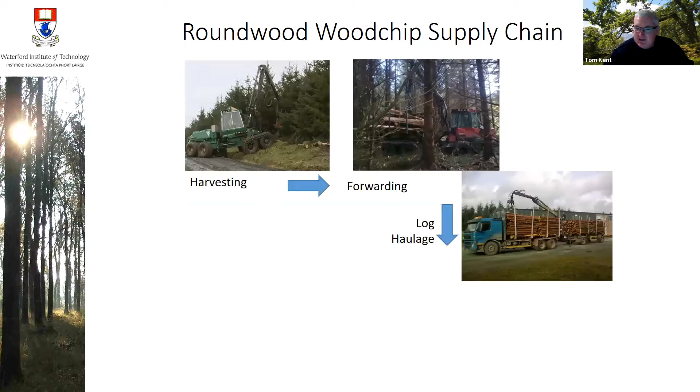So what might be considered a typical supply chain for wood chip production from roundwood is the thinning of your forest, the forwarding of roundwood to roadside, the transportation of that to some type of storage and seasoning facility at a terminal, and then the production of wood chip after seasoning and the supply of that wood chip.

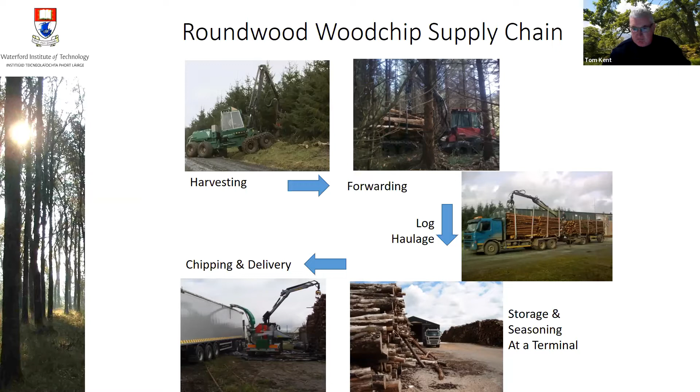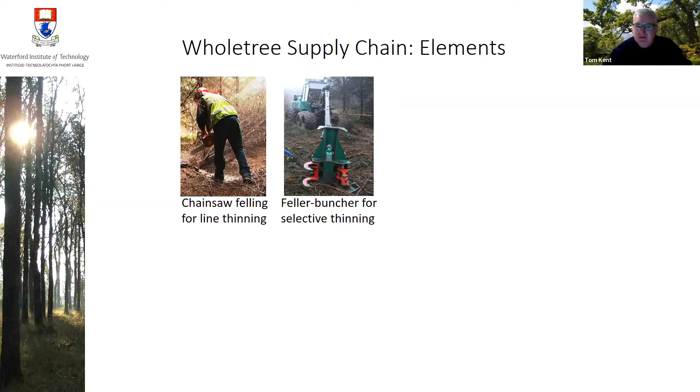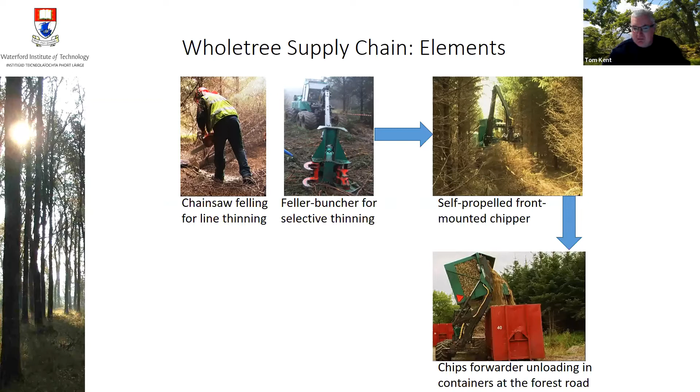Again, this is a supply chain we've a good deal of experience of in Ireland now, with many producers, and it's not the only supply chain we've studied. We've looked at other supply chains like taking whole trees by either felling with chainsaws or feller buncher and using a self-propelled front-mounted chipper, forwarding those wood chips to roadside with another specialized machine, a chip forwarder, and using container trucks for road transportation.

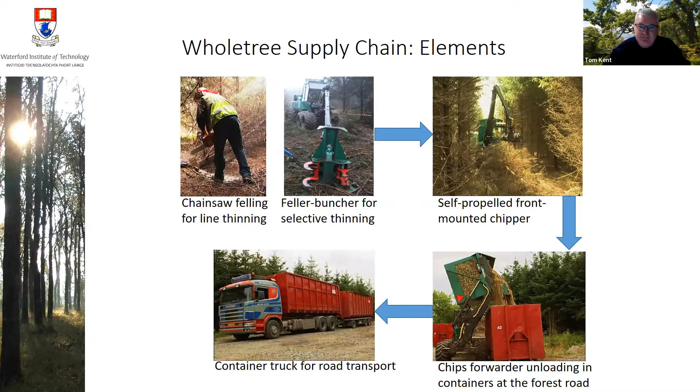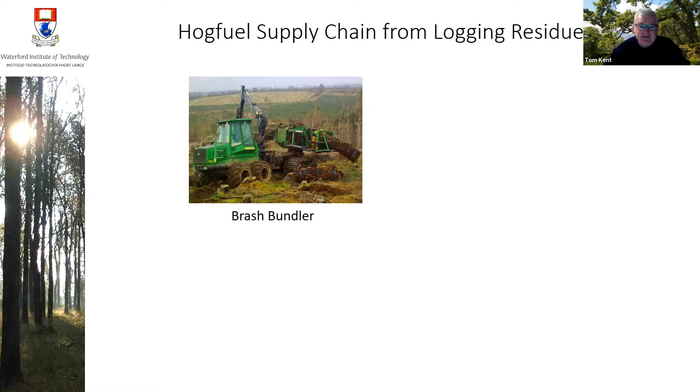We've looked at wood fuel production as well from the residues of clear felling—so the brash or lop and top that's left after roundwood harvesting at clear felling—starting with a brash bundler, the extraction of those bales to roadside, transportation to the end user, and shredding of that material into a hog fuel.

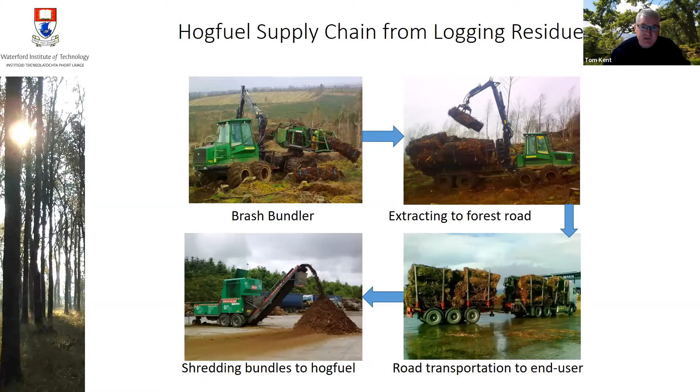We've even studied the excavation and windrowing of stumps after clear fell, extraction of those stumps to roadside, the shredding of the stumps, and again loading and transportation. So we've developed a good deal of knowledge of different materials coming from the forest and how to convert those into a wood fuel.

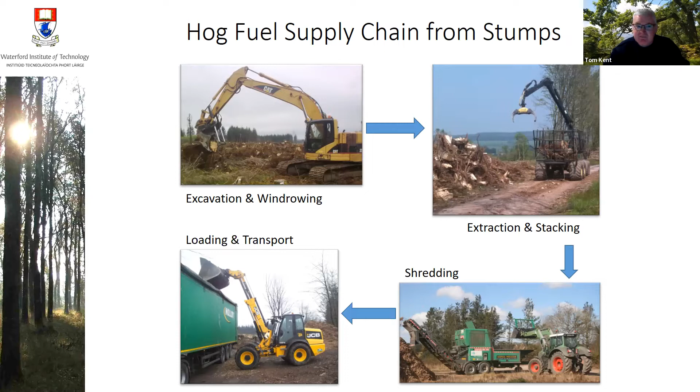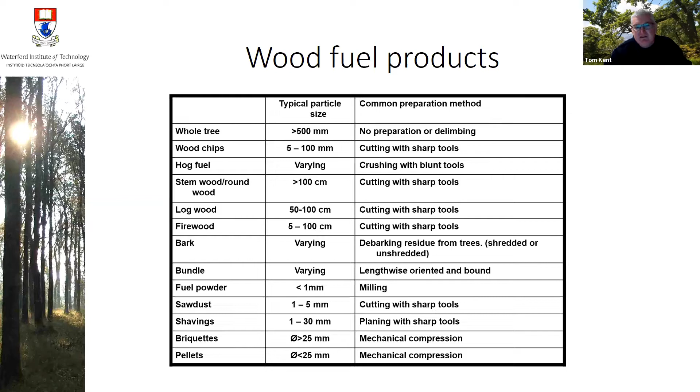These different supply chains produce very different types of wood fuel products. Here's a list from the international standards of just the different types of wood fuel products that can be described, where, as you can see, wood chip is just one of many.

So because of these different types of fuels that are produced, standardization is very important, and it's important for a number of reasons. The standardization of wood fuel quality is important to ensure that the fuel is compatible with the boiler it's being used in. Different boilers will have different fuel specifications, so it's important to know and match the right fuel for the right boiler.

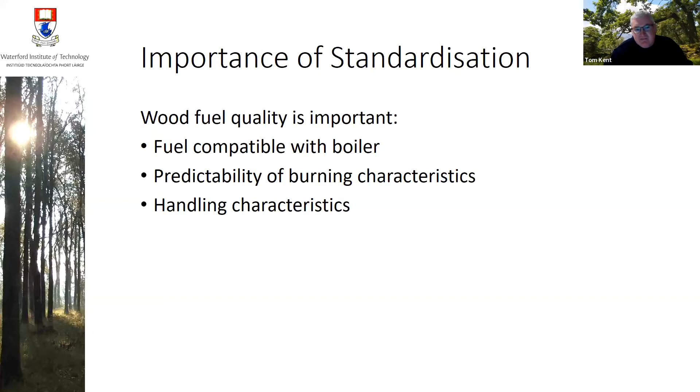A fundamental point is that both seller and buyer can trade with confidence. By standardizing fuel quality, that facilitates confidence in what's being sold and bought, achieving a fair price.

And this is an ongoing area of machine and equipment development, whereby manufacturers of chippers, of wood fuel transportation systems and wood fuel boilers are all developing more and more specialized, reliable, efficient equipment and machinery based around being able to target a standardized wood fuel.

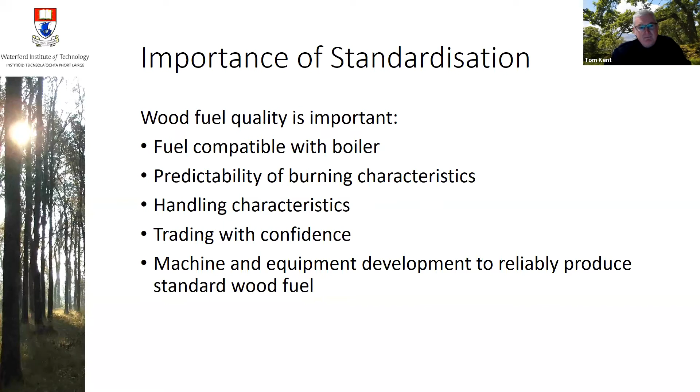So we've had now over 10 years of solid biofuel standard development. Initially, this work was started at European level with a technical committee on solid biofuels. Their work has been documented in a series of 26 standards, I think. Those European level standards were adopted at national level, so it became an Irish standard, and subsequently the current work is the global adoption of the initial European solid biofuel standards.

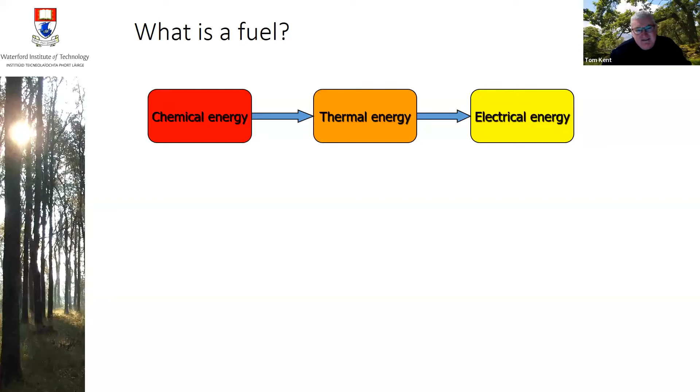Biomass fuels have a chemical energy that's based on their chemical composition, where mainly the carbon, hydrogen, and sulfur components are the ones releasing heat as they burn, and nitrogen, oxygen, and ash components are, if you like, taking some of that heat away. Why do I mention this?

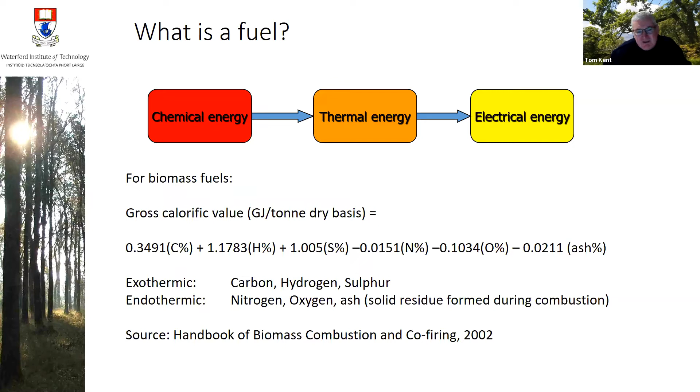Well, it's very simply that wood fuel has very, very consistent energy content when it's looked at as a dry material, so without considering the moisture content that's in the wood.

So why do we find differences in calorific value of wood? Well, I guess most of you have seen this sort of graph, the effect of moisture content on the calorific value of wood. There's this dramatic decline. So if we look at the calorific value of a ton of wood in gigajoules, it starts up here close to 20 gigajoules per ton.

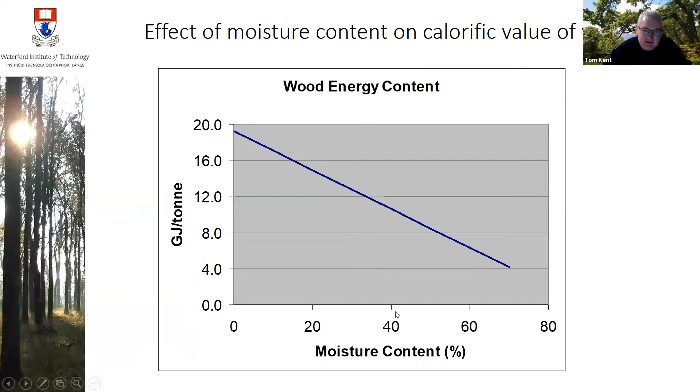I'd like to look at that in a bit of a different way, where, to be honest, a lot of this decrease in calorific value is simply because we're displacing wood with water. If we include the moisture content of wood, really what's happening in every ton is now there's less wood and more water. And so if we get to a 50% moisture content, it simply means that now we've only got half a ton of wood, but we've also got half a ton of water. So in fact a lot of that reduction in energy content due to moisture content is simply we're displacing fuel with water.

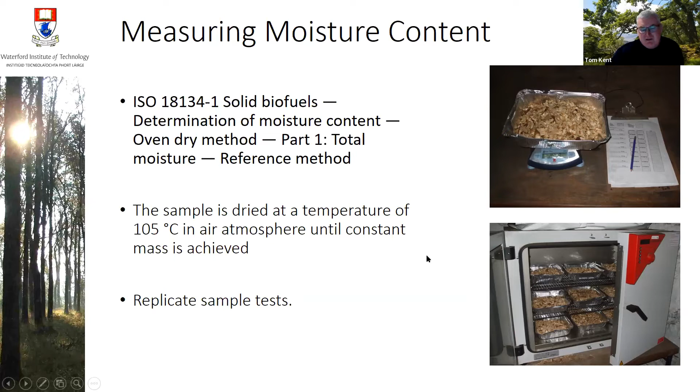So what's the expected moisture content of your fuel? We've got this international standard again for describing wood fuels, and that basically describes them in classes of 5% increments in moisture content.

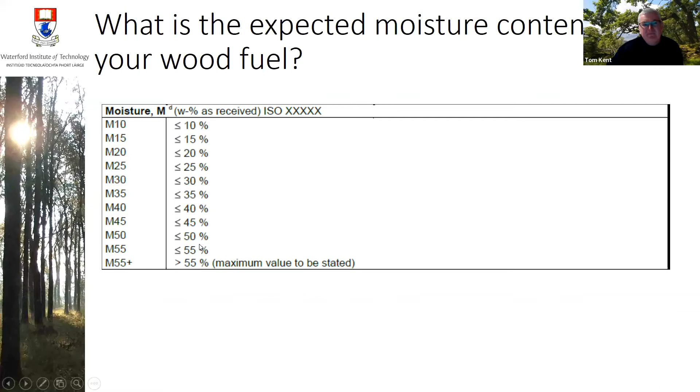So what can we do to store roundwood to promote seasoning? Again, it's not hugely complicated, but in Irish conditions what we can do is use the ambient environment, choosing the windiest, most exposed spot you can find, ensuring that logs are raised above the ground, and ideally covering.

This is a storage trial we did down in Cork a number of years ago, where we covered half the material and left the other half uncovered. And to be honest, what we would find is the uncovered material just had water lodged in it anytime after rain. So the cover really just had the effect of preventing that lodging of water.

We studied monitoring moisture content change over time quite intensely, and we've made these frames where we can constantly weigh the change, measure the change in weight of roundwood over time, and we can determine then how moisture content changes over time.

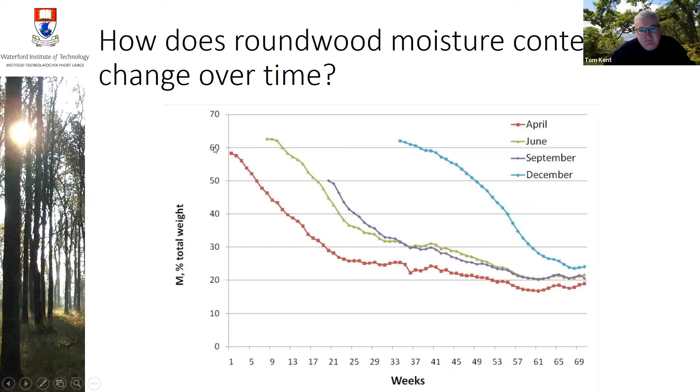We stored roundwood at different times of the year, starting it at different times of the year, and the effect of storing at different times of the year can be as much as nearly 3 months, 2.5 months in terms of the drying time to get to 30% moisture content. So really what we've found is, from March to September, we can get effective drying. From October to February, we don't.

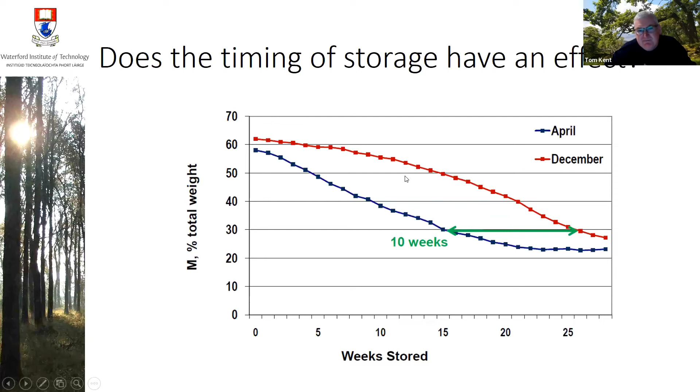However, what we did find was, as we looked at the material after seasoning, we selected out some logs throughout the stack, and the stacks with no cover had much more variable moisture content. So as we go down through the stack, we see wetter logs at the top and then gradually getting drier, whereas the covered stack had much more consistent moisture content.

We've done similar trials for firewood. We set up this trial in Carriganore in Waterford, where we looked at 10 different treatments. We cut firewood to different lengths, split it, and left some of it in the round. We covered some of it with tarpaulins and left some uncovered. We left some of it as 3 meter lengths, again covering some and leaving some uncovered. We produced this fantastically complicated looking graph, but in effect it just demonstrates the same thing.

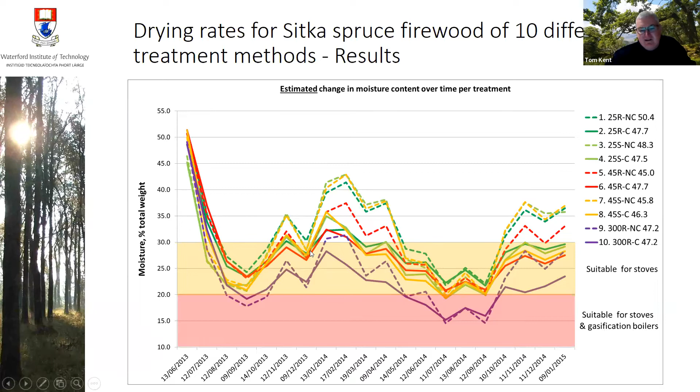So I wanted to focus on moisture content because the other parameters, if we use clean fuel and a reliable wood chipper, tend not to produce too many problems. But moisture content is the critical parameter that we have to understand and control.

In summary, we know how to produce dry wood fuel. It's really important that anybody producing wood fuel can monitor and measure their moisture content. And I would say also, if you're a wood fuel supplier and aren't already a member, definitely join the Wood Fuel Quality Assurance Scheme. Okay, I'm going to finish at that.

Okay, thanks Tom, that was very informative, and it's great that someone like you was doing such background into wood and wood energy and wood quality, and the Wood Fuel Quality Assurance Scheme. Sure, it's great that we have something here, a standard set up, and there's room for this to be pursued a lot more. So Tom, we'll leave it with you for the time being, and we'll head on to Will Gabbett because time is moving on.

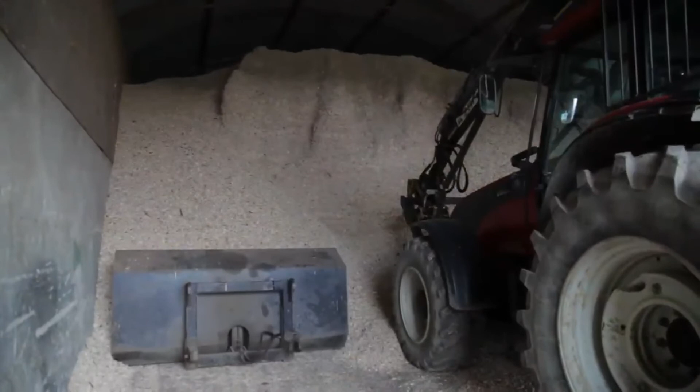We were delivering to about 10 or 12 different boilers within what we call tractor range, within a sort of 20-mile radius. With the wood chip, primarily the source of the timber is from local woods around the area that we would purchase in, because even with 100 acres of forestry, we're unable to supply ourselves with enough timber. So we buy from local growers through forest management companies or forest companies.

The very local nature of this fuel network speaks directly to current energy concerns. The whole concept of the thing being parish-based rather than a national base. So the timber comes from locally, and it's dried here, and it's chipped here, and it's delivered locally. So the actual carbon footprint of delivery and diesel and everything else is so much less.

When the wood chip business started up, they were buying in most of the softwood for chipping from local forests. This also points to the long-term nature of forest rotations. There's quite a lot of softwood that we do as well, so that's really good, because we can dry it down well below 20% within a 9-month period, as long as we have those summer months. That really is tied directly to the biomass that we buy in for chipping.

We can only supply ourselves with a small amount of timber for softwood, but hopefully there's more coming online all the time, because, as you mentioned earlier, it's a historic thing, and I'm working from what my father has planted in the past, and hopefully my kids will be working from what I've been doing in the past and all the rest. It really is a sort of slow process, forestry, and you're always just working with what people previous to you have done management wise.

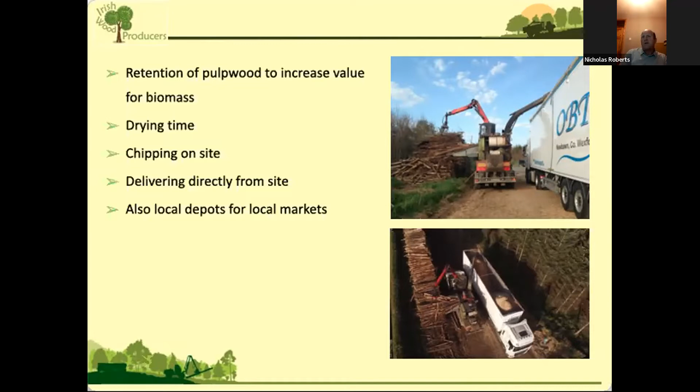So it's delivered directly from the forest to our end user. There are also smaller local depots as well for more local markets.

So, wood chip specification, Tom would be very familiar with this one. Here on the depot we have two sizes that we aim for, P100 and P60. Our customer Danone would be P100, which is basically a bigger chip with higher moisture content. The smaller boilers then would want P60 or P50 with lower moisture content. The smaller your boiler, generally the lower your moisture content has to be.

So we constantly watch our moisture contents. As I mentioned earlier, we have a humimeter or moisture meter, and we also have ovens and scales. Alex takes care of all of that, and the sieve shaker is just to get your particle size correct.

Even though the timber is grown in the forest with a roadway right beside it, you might think you'll just put the timber out there and everything will be grand. But as you can see from the picture, that's one of our chipping contractors, that lorry weighs 29 tons. He went in just off the roadway, and down she went. So there can be particular problems with trying to chip on site.

Some sites are brilliant, ready to go with no problems, but not everywhere is set up for it.

So there are a couple of different challenges with that. You have your drying time, which varies on different sites, especially in first thinnings, because the forest is growing and the roadway might go into the dead center of it. There's nowhere else to put the timber, so it's put in the dead center of the forestry with no airflow through it, since the trees are growing all around it. So it takes a long time to dry down, which creates challenges to chip on site. It works in some places, but not in others.

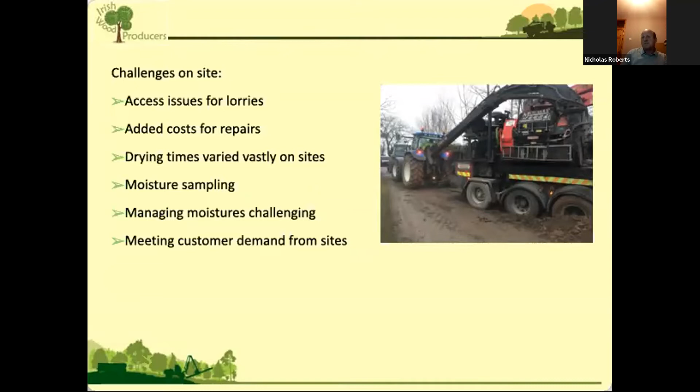So about 4 years ago, there was a decision made within the group to try and bring everything to a central depot, to try and control the moisture content, control the deliveries, and control unforeseen circumstances that can happen when you go on-site.

So a breakdown of what happens there: the pulp is harvested and put out roadside onto the forest. It then comes to the depot here just outside New Ross. The weighbridge is to the right-hand side, you can't see it, but it's weighed in over the weighbridge. It's then put down some of the roadways, which you'll see in the next slides.

The driver of the pulp lorry marks all the stacks with the grower's number, and all the stacks are put separately on the roadway. We then work out the time that particular lot came in and how long it will take to dry down. There's not a huge variation, but some species can dry a bit quicker than others, or if it's pulp from a clear fell rather than from a first thinning. So we watch all that and make sure it's drying down, and that we go to the right stack when we go to chip it.

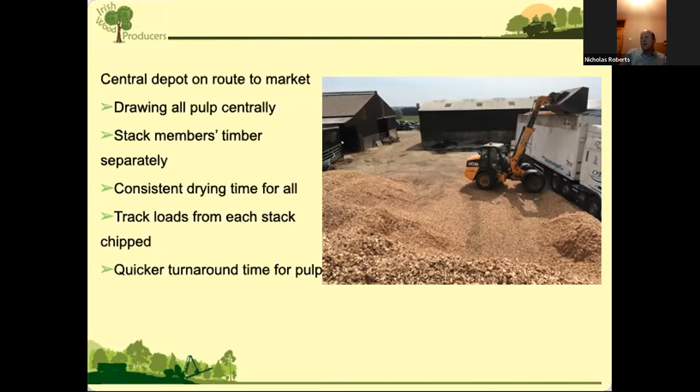Okay, next one please. So those pictures are of chipping on site here.

We'd like to think we manage the moisture more efficiently by having it here at the depot, and then we have a covered store. We had it outdoors for a few years, but we put up a covered store last year, and it's made a big improvement on our ability to control moisture content, obviously from the rain out of the sky. So it's all in a shed now, and we can guarantee that once we chip it at the given moisture, it's going to stay at that moisture content. It was a 60 meter by 25 meter shed put up last year, with a dividing wall in the middle, so we can keep drier or smaller material on one side, and the material for our bigger customer Danone on the other side.

So as I said earlier on, we're well geared up for the future. Hopefully there's an investment being made, and hopefully that will work out for us. Okay, on you go.

So as I said earlier on, there are north of 850 members now. Sustainable forest management practices, that's something we're very clued into, making sure we follow everything our customers require in terms of, I can't say certification because we're not there yet, but we're on our way to that. But we have what's known as a chain of custody from source to market, which helps us guarantee that all our timber is harvested sustainably, looked after well, and that we send a quality product to our end user.

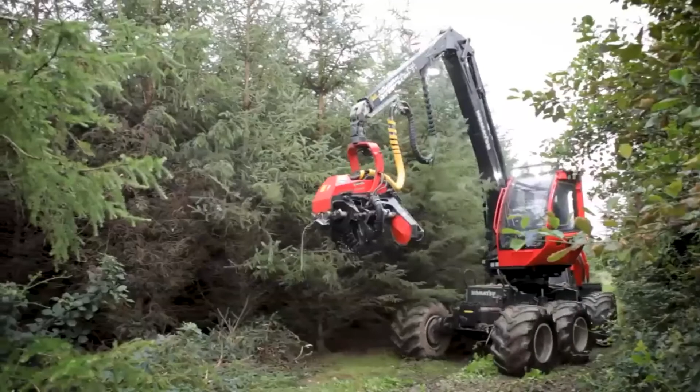It's very important to us to support the local community as well. So as a business in the southeast of Ireland, we're very keen to support other local businesses and try to build the community and build our suppliers up locally.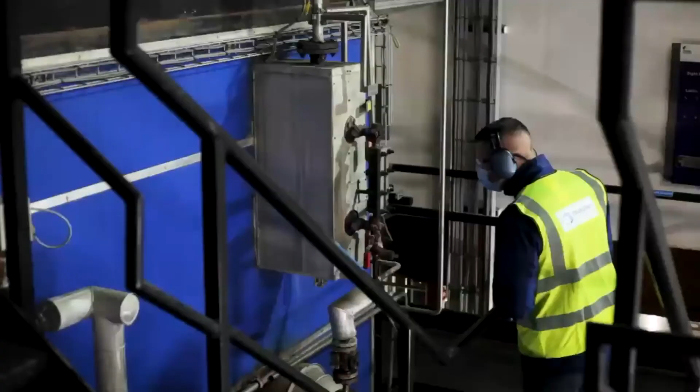The biomass boiler drives this process, and from the delivery of the wood chip there's a lot of expertise and precision brought to bear. The truck backs in, and first of all we take samples here on site by our boiler man, and he'll bring it down to the oven, and that's where we get our moisture content from weight before and after heat.

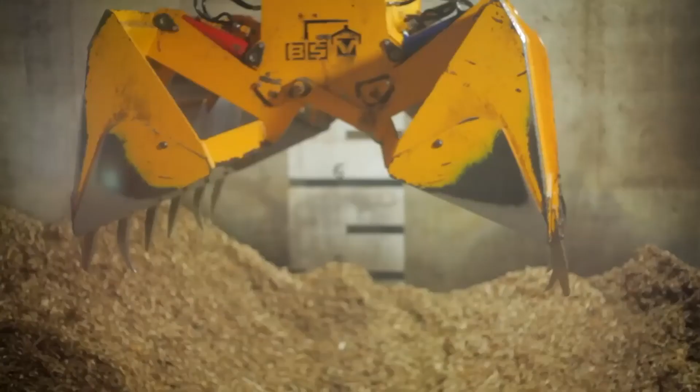After that it's put in the pit, divided out then in the store with a crane that runs 24/7, so again there's a lot of maintenance on that crane. From the store then into the hopper, so it feeds down then into the biomass.

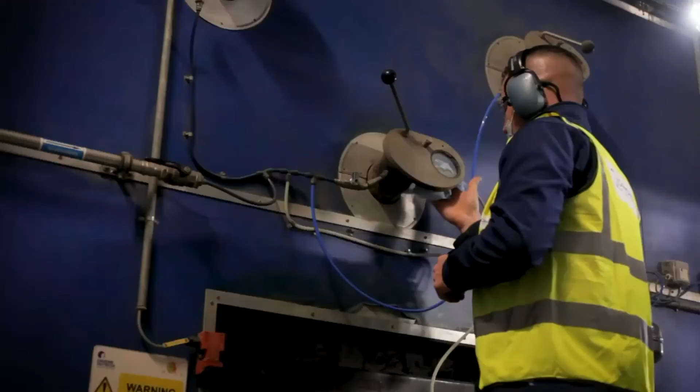The biomass itself at maximum capacity can produce 6 tonnes of steam an hour at 17 bar pressure, which is extreme. We take in 40 tonnes of wood chip a day, so it's an awful lot of wood chip provided to meet that demand from the factory, along with reaching that bar, that pressure, and there's a lot of maintenance involved on the boiler itself.

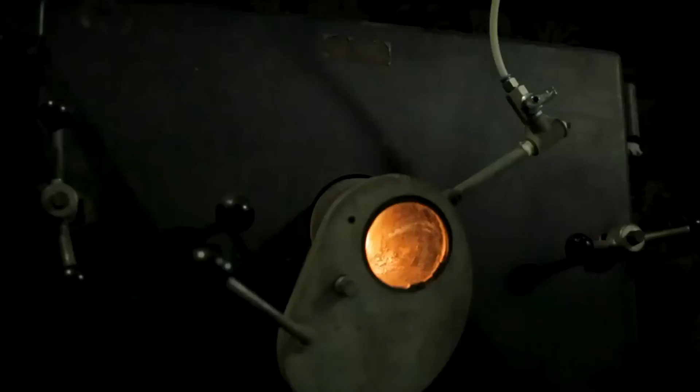While Danone invest heavily in what happens inside the plant in Wexford, this project was also driven by its commitment to supporting local farmers who were growing trees as part of their farm enterprise. And the Danone commitment has seen the local wood fuel economy grow.

The majority of it will probably go for chip, and there will probably be a certain amount of pallet in it. But through our producer group here in Wexford, Irish Wood Producers, we have a good contract with a local company that has taken a substantial amount of our wood chip, and we have a premium price. That's really important to us.

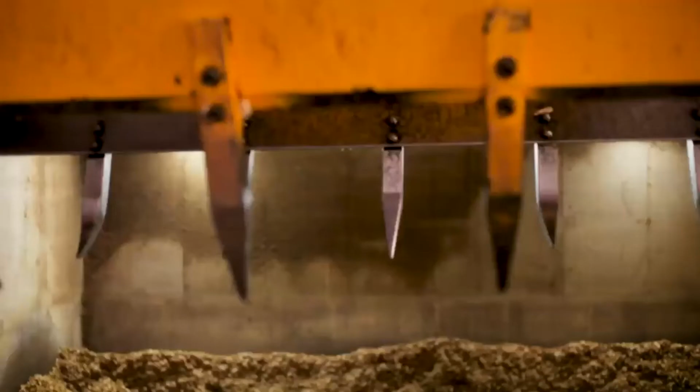It's a fantastic story that we're able to support such a great project locally here, support local farm families, support the local community, help to secure employment in the area, help to secure revenues in the area. So that's hugely important to Danone, and hugely important to our story here of becoming carbon neutral as well.

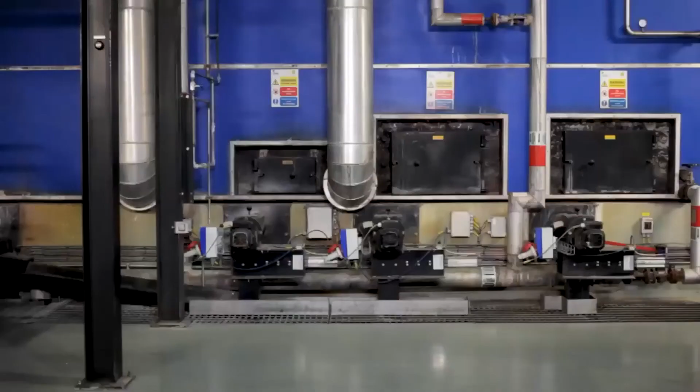Danone's path to carbon neutral status has been based on rigorous scientific method. Danone took 3 simple steps, which was measure, reduce and offset.

So back in 2010 we took a measurement of all carbon emissions here on site. Then, to reduce it, we looked into renewable energy to make the site as energy efficient as possible, and the final step was to offset. So the remaining carbon gases on site, we offset by contributing to the gold standard carbon credit with the Livelihoods Fund. With these three steps combined, we hit the goal of an 80% reduction in carbon gas, which is equal to taking 5,000 cars off the road each year. So it's a massive achievement, a lot of hard work.

Danone has made huge changes to date in their commitment to reaching carbon neutrality. Now they want to ensure this progress is built on into the future. The next step on the journey for us, now that we're carbon neutral, is this year we hope to be finally certified as a B Corp company. What that means is, as a B Corp company, you're legally required to take into account in all your decisions the impact on your employees, your suppliers, the local community, and the environment. So it's a sustainability certification that encompasses all aspects of sustainability, and it becomes legally binding for the company to build that sustainability into all aspects of its business. That really underpins our One Planet, One Health vision, where we believe at Danone that the health of people and the planet are intertwined. You can't have one without the other.

That's great. Look at it.

That was a video there done by both Connor and Mark Stafford, two employees of Danone. You can see there where Danone are going, and they're very happy working in conjunction with producer groups like ourselves. It's a double gain for them - they're looking at producing and maintaining their zero carbon, and in conjunction with the Irish wood producers and other suppliers, they're doing that on their energy needs.